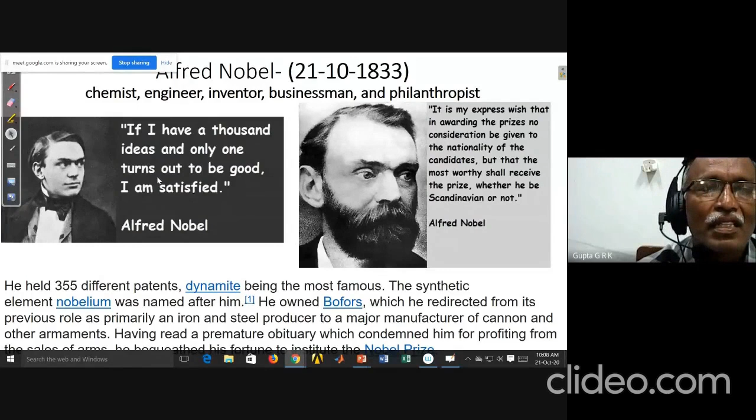And there is another great mathematician, Martin Gardner. I like him very much. He has written so many books on mathematical puzzles, fallacies and paradoxes. He has written so many articles, and he maintained a column in Scientific American for 25 years, these mathematical games.

So whenever I go to the library, the first thing I do is check whether they have Scientific American. I used to go to that rack and find out, and there is an article of Martin Gardner in that. Now he is no more, he is not there. But when I was in IISc, I was a great fan of this particular article.

He was considered the doyen of American puzzles. He was a prolific and versatile author, publishing more than 100 books.

He says, if God creates a world of particles and waves dancing in obedience to mathematical and physical laws, who are we to say that he cannot make use of these laws to cover the surface of a small planet with living creatures? The universe is almost like a huge magic trick, and scientists are trying to figure out how it does what it does.

Okay, that's it. And if you come to the 29th class of today, we'll just browse through or revise whatever all we learned about air standard cycles.

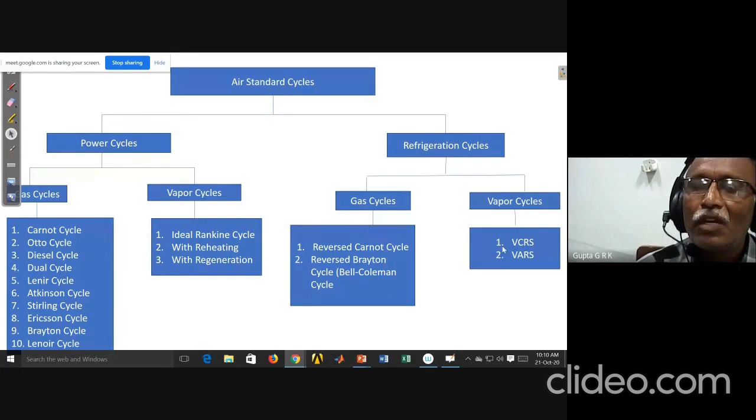In refrigeration cycles, we will have gas cycles. If you reverse Carnot cycle, we get reversed Carnot cycle. If you reverse Brayton cycle, we call it Bell-Coleman cycle. So we know that refrigeration cycle is nothing but reversed power cycle. And in vapor cycles, we have vapor compression refrigeration system and vapor absorption refrigeration system. This is the broad classification.

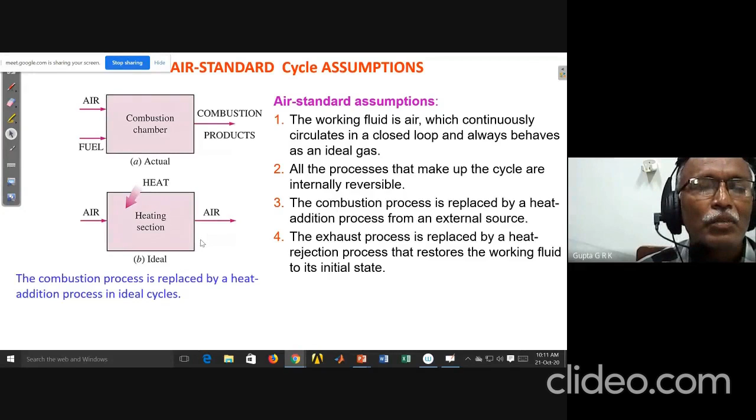So then we have seen what are the air standard cycle assumptions. We assume it is a perfect gas, all processes are internally reversible, and heat exchange processes take place instead of heat addition and rejection. So instead of air burning with fuel, we assume that heat is exchanged to the air without changing its composition. That's why we have a closed cycle, and the combustion process is replaced by a heat exchange process.

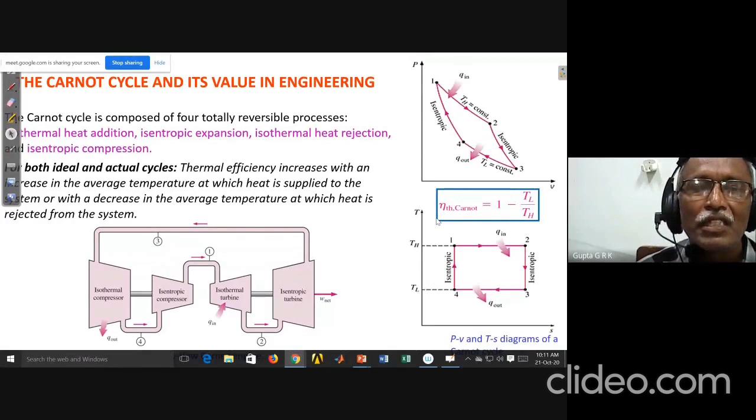And Carnot cycle processes are all ideal processes. This is the general configuration of a Carnot cycle. And efficiency, we know, is 1 minus TL by TH. So the main thing we observe here is that the efficiency of the Carnot cycle increases as we increase the average temperature at which heat is supplied, and decrease the average temperature at which heat is rejected.

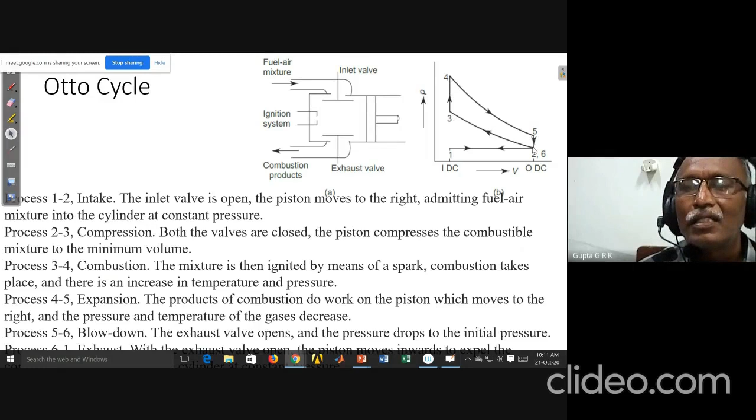And coming to the Otto cycle, we have seen all the processes. I told you there is inlet and exhaust stroke, which normally we don't show in the cycle. We show only these 4 processes: compression, combustion, expansion, and release. So this is that, and we have derived the efficiency.

Efficiency is a function only of the compression ratio, RK, that is V1 by V2. Coming to the mean effective pressure, we didn't derive it, but you should be in a position to derive this. It is a function of not only the compression ratio, but also the pressure ratio, P3 by P2, called RP. And the efficiency increases with compression ratio and also with gamma. This is what we have seen.

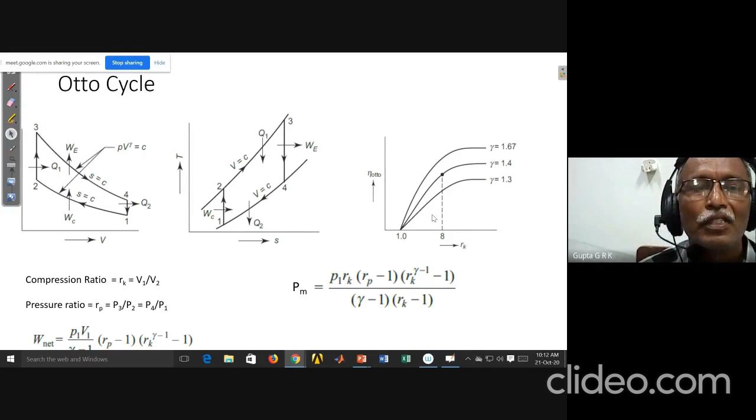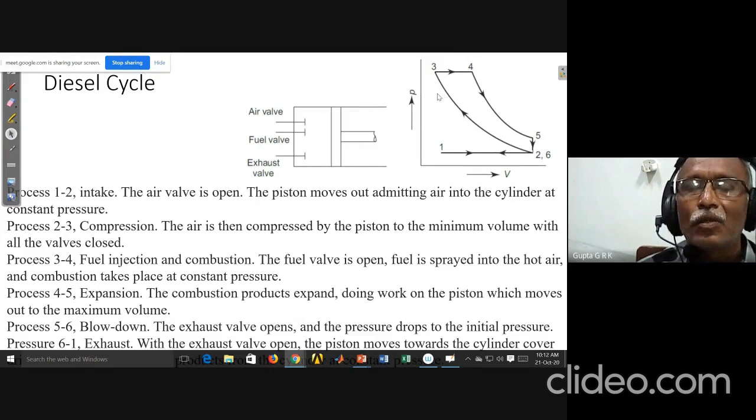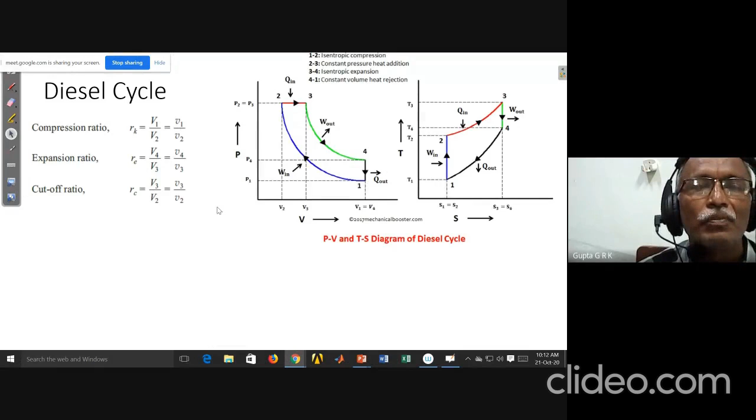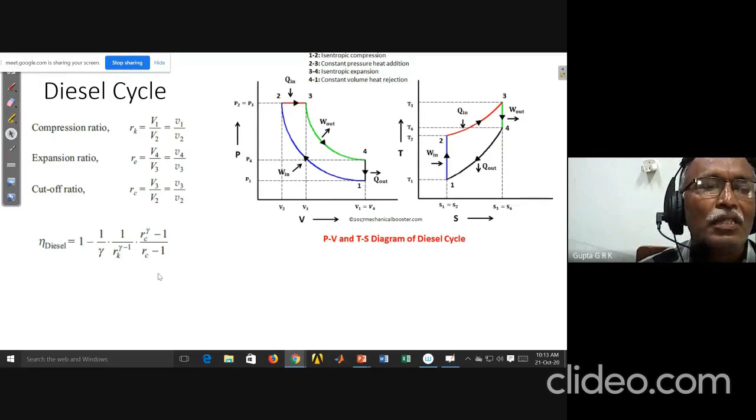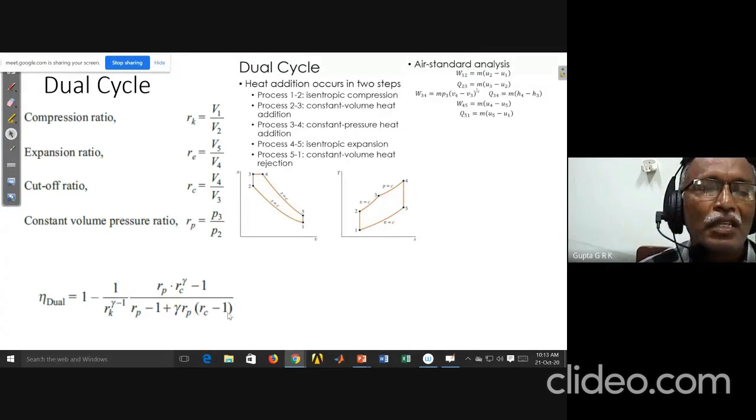Then dual cycle, where we have partial constant volume combustion and partial constant pressure combustion. We have derived the dual cycle efficiency, which is a function of pressure ratio and compression ratio. The mean effective pressure also we can derive. So what we have to do is find W expansion and W compression, and subtract it. You will get the work output by swept volume, you have to find.

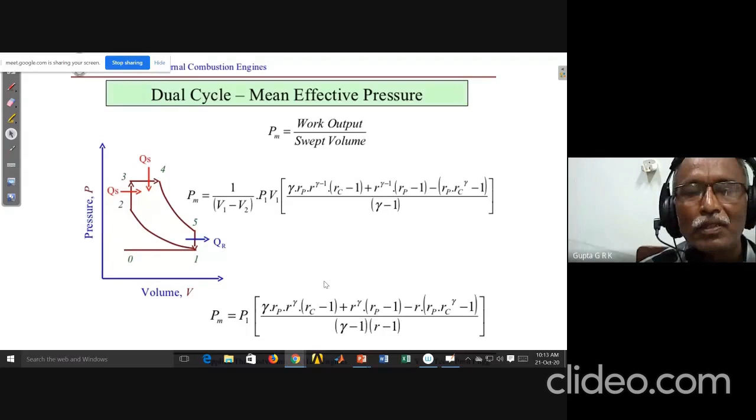And comparison also we have done for different cases. For the same compression ratio, we have seen that Otto cycle is more efficient, and for the same maximum temperature and pressure, diesel cycle is more efficient.

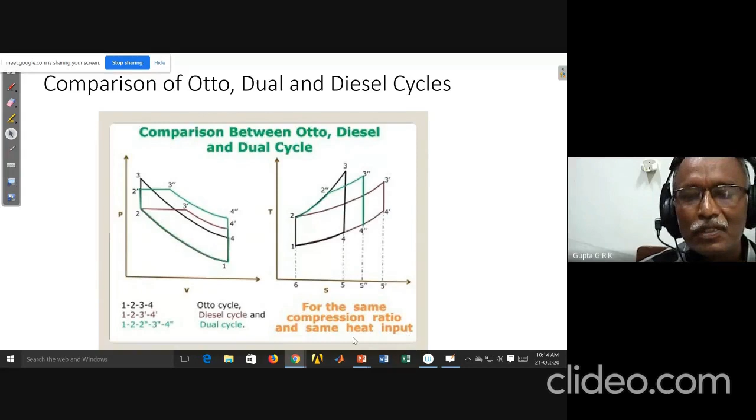And comparison between Otto, diesel, and dual cycle for the same compression ratio and same heat input. Heat input also is same. So here, again, we can see that Otto cycle is more efficient, because whenever compression ratio is same, whatever the difference in other things, Otto cycle becomes more efficient.

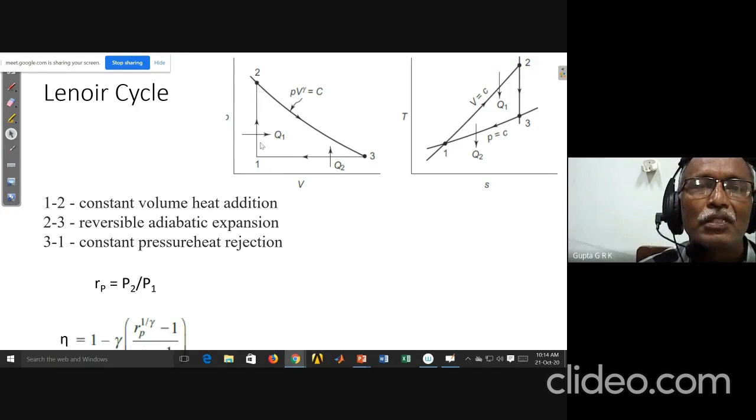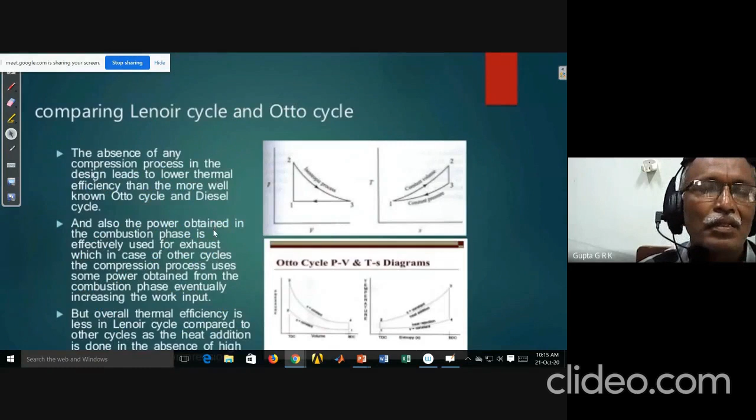Then here also we have derived the expression for efficiency in terms of pressure ratio. Pressure ratio is P2 by P1. And you can compare Lenoir cycle and Otto cycle. So the only thing is Lenoir cycle is not found to be efficient because of lack of compression in it.

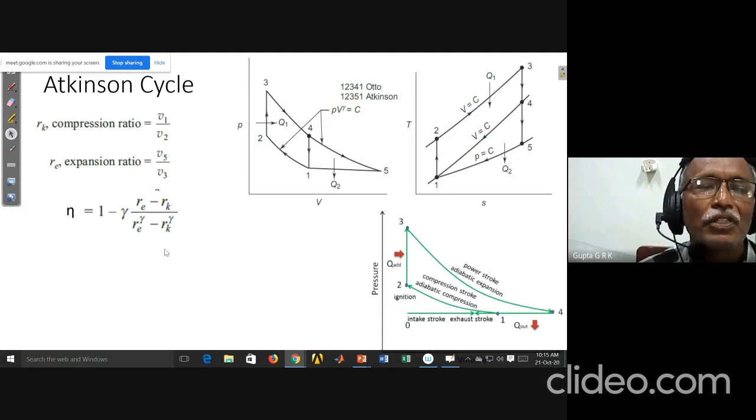Then coming to Atkinson cycle, where I have constant volume heat addition and constant pressure heat rejection. We can see the efficiency is a function of compression ratio and expansion ratio. Expansion ratio is V5 by V3. Here you can see comparison. If you say this is Otto cycle, it is extended Otto cycle, so this piece is extended, and you can compare with efficiencies.

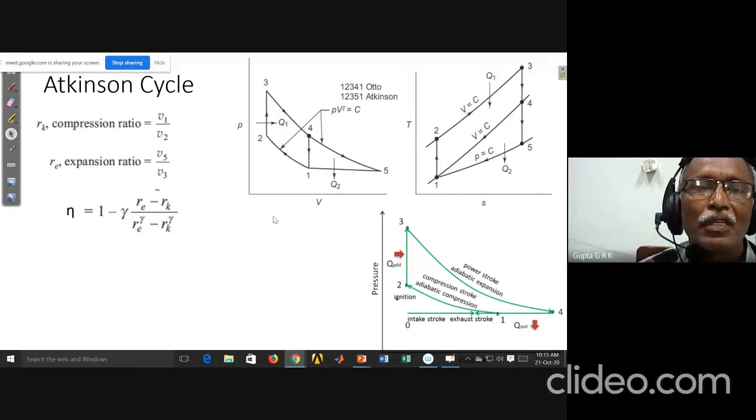So Otto cycle will have this as the heat rejection, and Atkinson cycle has this as heat rejection. So you can see that area is more, and work done is more in Atkinson cycle. Atkinson cycle is more efficient than Otto cycle, but it is not practical because of constant volume combustion, which needs valves to be operated at very high temperature.

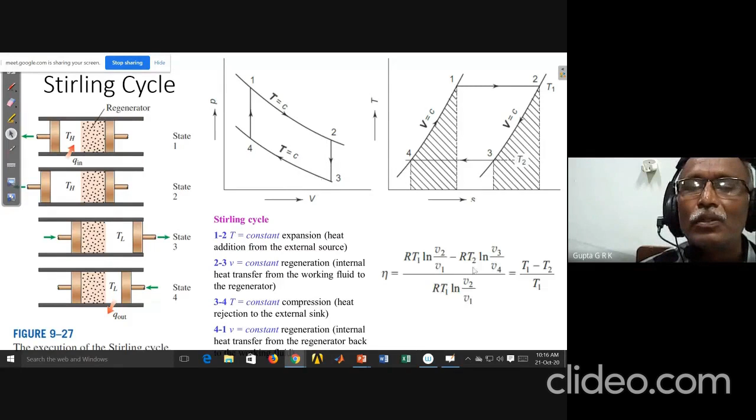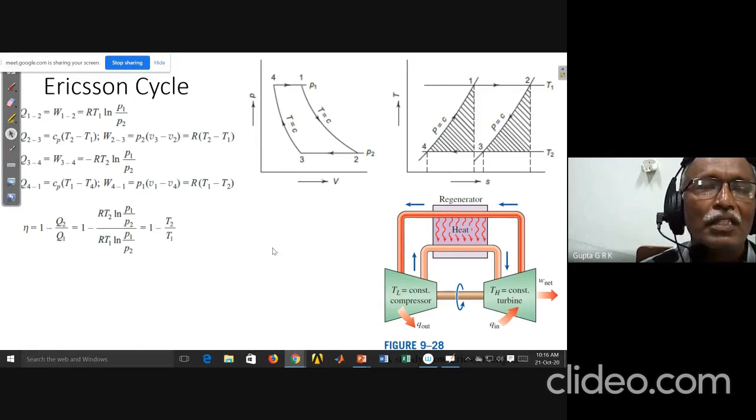And then we have seen the Stirling cycle, which has two isothermals and two isochores, with isothermal heat addition and rejection. That's why, if I have perfect regeneration, then efficiency will be equal to Carnot cycle efficiency. In the same way, Ericsson cycle also we can see, instead of isochores, we will have isobars here. Here also, if regeneration is proper, its efficiency is equal to Carnot cycle efficiency.

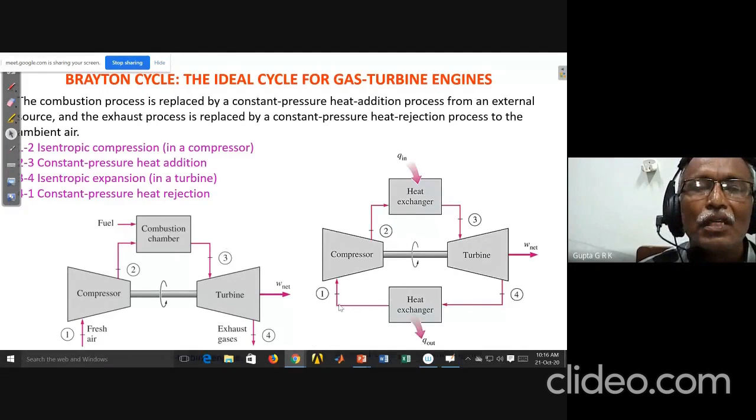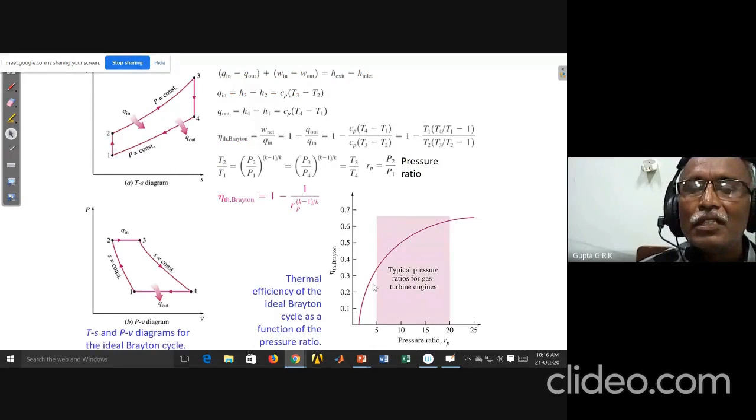And coming to the Brayton cycle, as I told you, already learned in turbo machines, you can see that efficiency is a function of pressure ratio. It is 1 minus 1 by Rp to the power of gamma minus 1 by gamma. Its efficiency increases with pressure ratio. And you can see that there are two extremes of pressure ratio.

If pressure ratio is 1, I will have 0 work done. And even if the pressure ratio is very high, such that it is compressed up to the maximum metallurgical limit, then also there will be 0 work done.

There is a particular pressure ratio which gives maximum work, and that is when T2 becomes equal to T4. That's why I cannot have heat exchange there. I can plan for a heat exchanger because of that.

If my pressure ratio is less, T4 is very high and T2 is very less. So in this case, T4 is so high and T2 is so low, and I can use the heat exchanger to recover that. So heat exchanger can be used only when T4 is greater than T2.

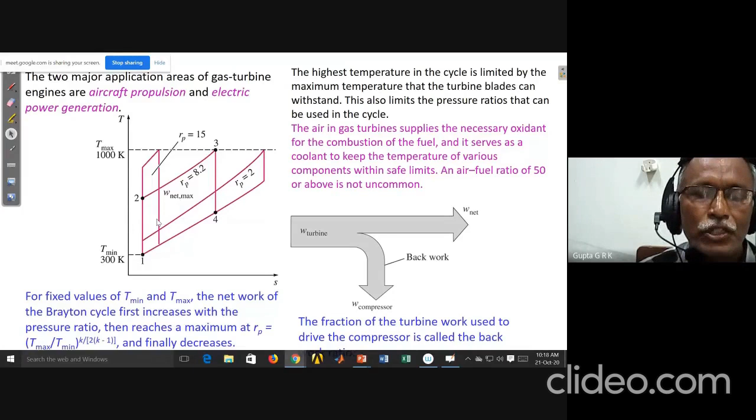If T2 is greater, in this case T2 is very high and T4 is less, I cannot have a heat exchanger because after the compressor the temperature is very high, and after the turbine the temperature is very low. So only if your pressure ratio is less than the optimum pressure ratio, we have to use the heat exchanger.

And so this is the Brayton cycle with regeneration, where T4 should be greater than T2. That's why if you see a perfect heat exchange cycle, when epsilon equals 1, its efficiency will be equal to Carnot efficiency.

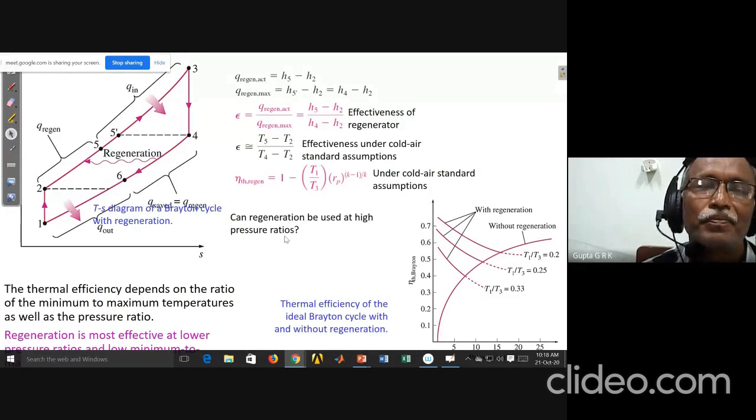As the pressure ratio increases, efficiency actually decreases, and at optimum pressure ratio this will be equal to the simple cycle efficiency. And you can think of intercooling and regeneration.

As I told, intercooling reduces compressor work, and reheating increases the turbine work, by which I can increase the work done. But efficiency gets reduced because I'm adding some low efficiency cycles to the original simple cycle.

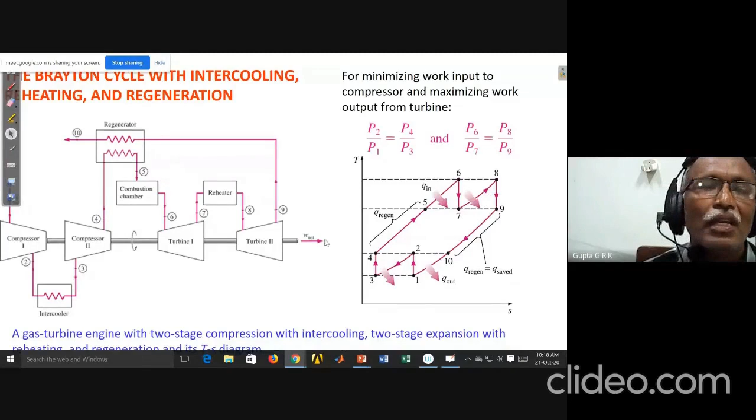And if I have a heat exchanger, I can have a large increase in efficiency. If I can have infinite intercoolers and infinite reheaters, and if I can have perfect regeneration, then this efficiency will become the Ericsson cycle efficiency, which is equal to Carnot efficiency.

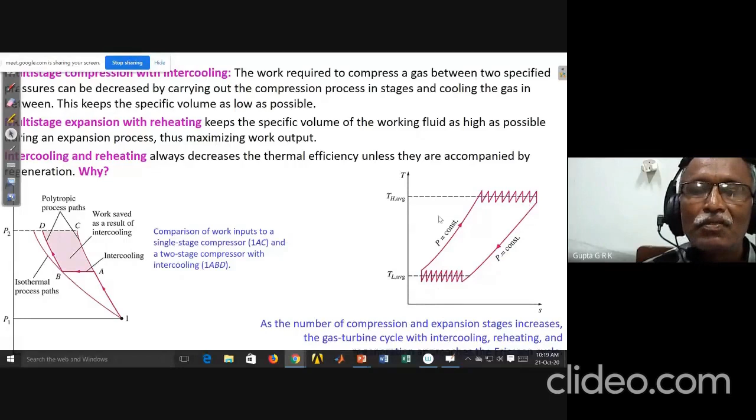Carnot cycle: 2 isentropics, isothermal heat addition and isothermal heat rejection. Stirling cycle: 2 isochores, isothermal heat addition and rejection. Ericsson: 2 isobars, isothermal heat addition and rejection. So these 3 have the same efficiency.

Wherever I have isothermal heat addition and rejection, they are purely reversible, and that's why these 3 have the same efficiency. In the other cycles, 2 isentropics are common, and if there are 2 isochorics for heat addition and rejection, that is the Otto cycle.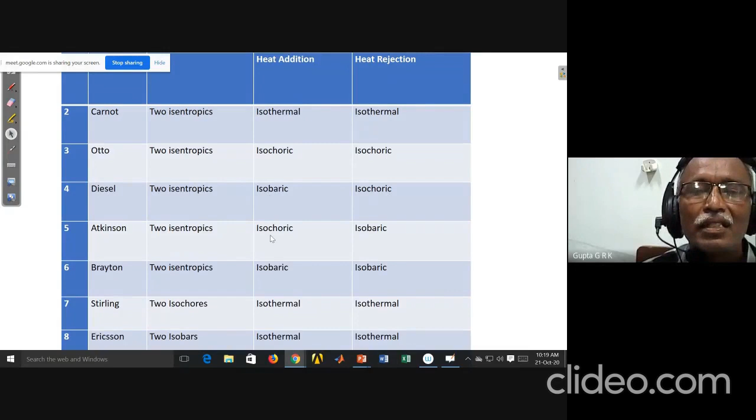Isobaric heat addition with isochoric heat rejection is the Diesel cycle, and Atkinson has isochoric heat addition with isobaric heat rejection, and Brayton cycle has both isobaric heat addition and rejection. These are the various cases we have studied.

And actually there is the Lenoir cycle, with 1 isentropic, isochoric heat addition, and isobaric heat rejection. I have done that, but it didn't come here. This is the revision of 8 standard cycles.

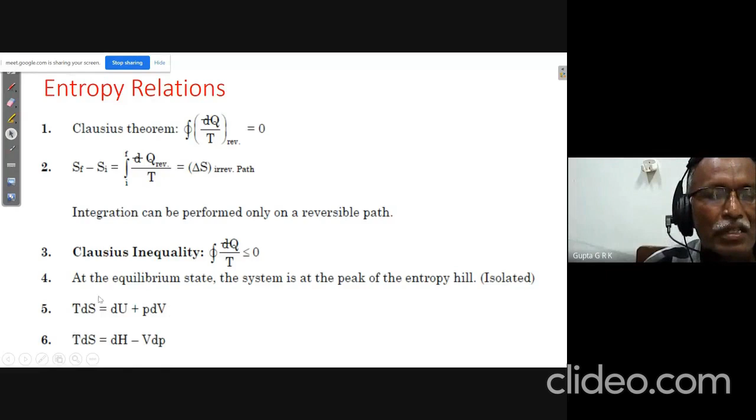But when you combine these two, this is true for any cycle, because there are only properties involved. So these two are called the TdS relations, which are true for all processes.

And so delta S is greater than or equal to 0 for an isolated system. Otherwise it is delta Q by T. For an isolated system, delta Q is 0, that's why we have taken it to be 0 here.

So this delta S total, if I take the isolated system as system plus surroundings, which is the universe, this must be greater than or equal to 0.

Whatever happens, there will be an increase in entropy, and that is called S generation, generation of entropy. So generation of entropy equals 0 for a reversible process, and it increases, so greater than 0 for an irreversible process, and it can never be less than 0. So if it is less than 0, it is impossible. This is what is called the increase of entropy principle.

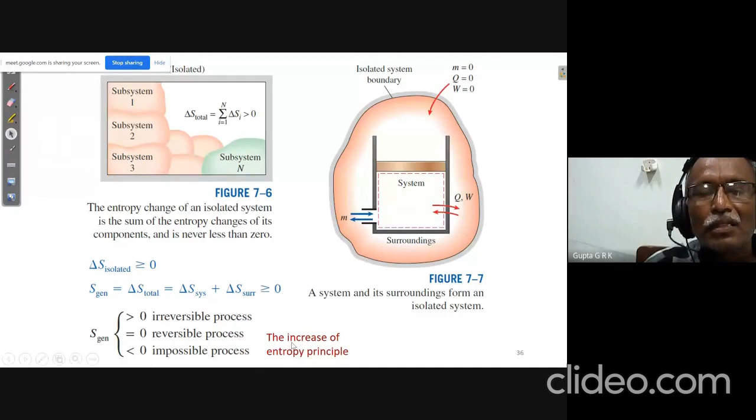We have also seen entropy change for a pure substance, how to find out about it. If I know it is in saturated condition, I can find out for any given pressure and temperature from the tables, SF and SG. If I know the dryness fraction, S2 equals SF2 plus X2 SFG2. In that way you can find out the entropy for a wet mixture.

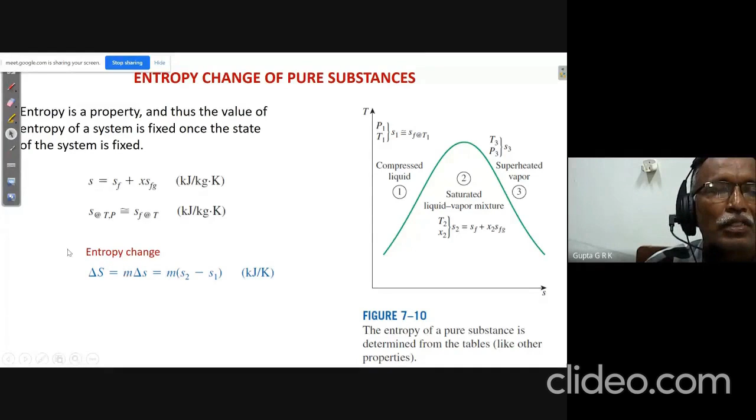If it is superheated, I can find out from the superheated tables, go to the P3 table and the T3 row, and I can get this. If it is compressed liquid, you can take entropy equal to SF at that particular temperature. So at that temperature, find out SF, and that can be taken as SF for the compressed liquid portion. Entropy change M delta S is M into S2 minus S1 for the total change in entropy. This is specific change in entropy.

And TdS relations, it comes from the TdS relations. TdS relation, change in entropy: S2 minus S1 equals Cv log T2 by T1 plus R log V2 by V1. This is one relation. And Cp log T2 by T1 minus R log P2 by P1, this is another relation. As I told, we will get a third relation also.

Cv log P2 by P1 plus Cp log V2 by V1, like that we will get another relation. Based on the process, I can use any relation. If it is isochoric, use this relation, which makes it 0. If it is isobaric, use this, it will become 0. And if it is isothermal, you can use any of them because one of them will become 0.

And this is on mass basis. If it is on a unit mole basis, instead of R here I will have the universal gas constant. Instead of Cp, Cv on mass basis in kilojoule per kg Kelvin, I will have Cv bar and Cp bar, which is kilojoule per kilomole Kelvin. So these also will be available in the database.

Normally we don't get problems of this sort; we use kg basis only. Usually for chemical engineers, they always talk about moles and the universal gas constant and Cv bar. Chemical engineers will use that.

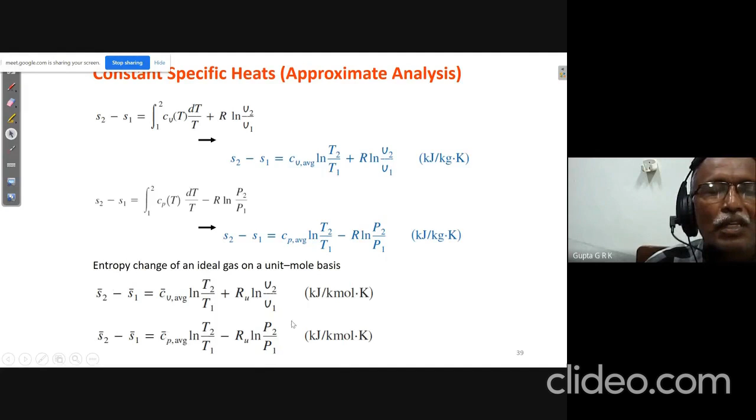When you consider a closed system, for an adiabatic closed system, S generation equals S of the adiabatic system. For system plus surroundings, S gen equals sigma delta S of system plus delta S of surroundings, if there is heat transfer between system and surroundings. System's entropy change: delta S of system equals m into S2 minus S1. But for surroundings, we have to find out the heat transfer from the system to the surroundings, or vice versa, and divide by T of surroundings.

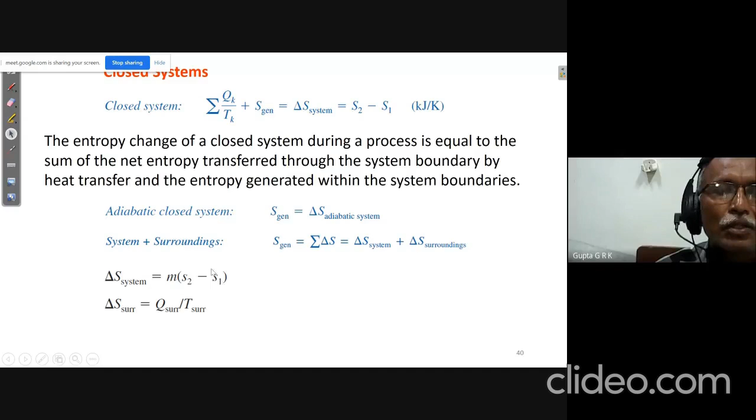Usually this is very important when we do the problems later. We have to see whether the body temperature is the same or varying. If the body temperature is the same, I have to use this particular relation. If the body temperature is changing, then you have to use Cp log T2 by T1 or Cv log T2 by T1.

For a control volume, the rate of change of entropy for the control volume equals the rate of mass entering into its entropy minus the rate of mass leaving, so this is the net rate of entropy entering the system plus generation of entropy. And if there is any heat transfer, sigma q dot k by Tk. So these are the reasons: this is entropy change because of the mass, this is entropy change because of heat transfer, and this is entropy generation because of irreversibility.

This total makes the control volume entropy change. So this is an unsteady flow general equation. If I have steady flow, this dSCV by dt will be 0, and I will have only these terms.

S dot gen can be written in this way. If there is a steady flow single stream, then m dot I equals m dot E equals m dot into SE minus SI minus this. So if it is steady flow single stream and adiabatic, then this will be 0, and generation of entropy equals m dot into SE minus SI.

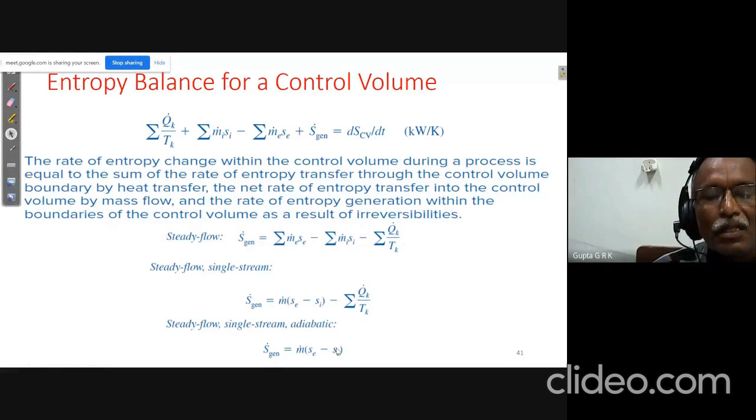It is only because some mass is entering and leaving, its entropy changes. Because it is entering with some entropy and leaving with some entropy, there will be a change in the entropy of the system, and also entropy generation will be there.

Okay, these are the problems we will see. 10 grams—actually we have done some 2 problems when we discussed the entropy chapter.

10 grams of water at 20 degrees centigrade is converted into ice at minus 10 degrees centigrade at constant atmospheric pressure. Assuming the specific heat of liquid water remains constant at 4.2 joule per gram Kelvin, and that of ice to be half of this value, that is 2.1, and taking the latent heat of fusion of ice at 0 degrees centigrade to be 335 joule per gram, calculate the total entropy change of the system.

So how do we tackle it? As we have seen, there are 3 steps. The problem which we discussed already was going from ice to water, and now this particular problem is water to ice. So there are 3 stages: sensible heat removal, latent heat removal, and again sensible heat removal.

It is initially at 20 degrees centigrade. First, it has to become 0 degrees centigrade water. So this is 293 Kelvin, and it is going to 273 Kelvin. So the change in entropy will be Cp log T2 by T1, that is Cp log 273 by 293, which will be the change in entropy for the water going from 20 degrees centigrade to 0 degrees centigrade.

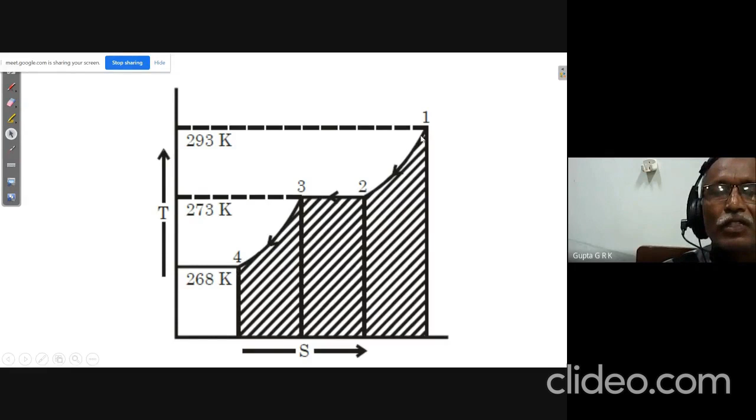So that is the way it is done. It is coming from 293 to 273, then it is changing its phase, and then it is coming to 268. So we have to find out delta S12, delta S23, delta S34.

So this is the way we find S2 minus S1, M Cp dt by T, that is M Cp log 273 by 293. It is going from 293 to 273, so it becomes 273 by 293, and it will become negative since it is going from 293 to 273.

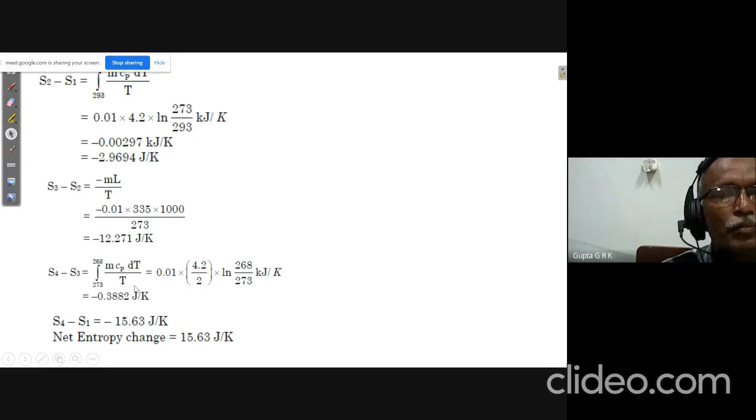S3 minus S2 is m L by T, this is the latent heat at the constant temperature 273. And S4 minus S3 is again M Cp log T2 by T1, where Cp is half of the water Cp, so it is 4.2 by 2. That is the way I can find out the entropy change in all three phases.

We will see another problem. Calculate the entropy change of the universe as a result of the following process: a copper block of 600 grams of mass with Cp of 150 joule per Kelvin at 100 degrees centigrade.

In this particular problem, capital Cp is given, it is not specific heat, it is joule per Kelvin, so it is M into Cp. This is MCp, not joule per kg Kelvin, it is joule per Kelvin. You have to understand that particular thing. The copper block at 100 degrees centigrade is placed in a lake at 8 degrees centigrade.

It is asked to find out the entropy change of the universe, when a copper block is put into a lake. The block is at 100 degrees centigrade, and the lake is at 8 degrees centigrade. So the copper block cools to 8 degrees centigrade, losing heat, which causes a decrease in entropy of the block. At the same time, the lake takes in some heat, but its temperature remains constant.

For the block, I will use Cp log T2 by T1. For the lake, I have to use Q by T. What is Q? I have to find Q as Cp dt, or MCp dt. So Cp of the block is given, and dt is 100 minus 8. That gives Q, so in that way I have to find out both of these things.

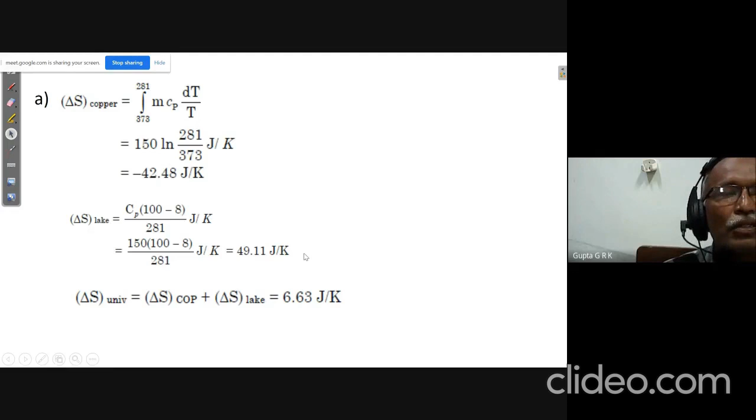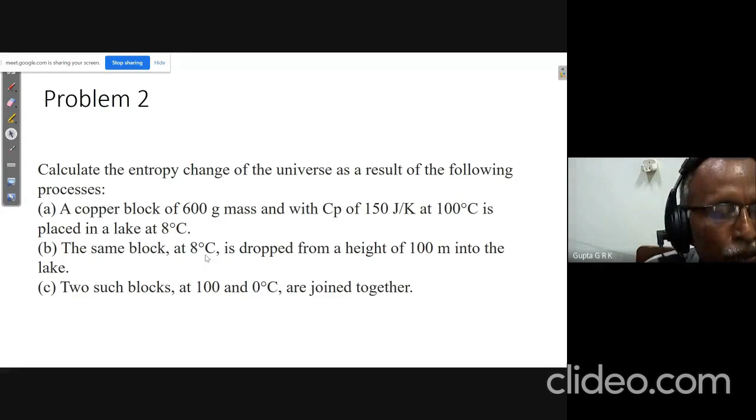Another case is given: the same block at 8 degrees centigrade, with 600 grams of mass, is dropped from a height of 100 meters into the lake. What is going to happen here? Potential energy creates heat, yes, that's right.

And what happens to the change in entropy of this copper block? The block also is... everything okay? Okay.

So in this second case, a block at 8 degrees centigrade is dropped from a height of 100 meters into the lake. If you see the block itself, there is no change in its temperature, so there is no heat transfer from the block. Since its temperature is not changing, its entropy remains constant. The change in entropy for the block is 0, but it is transferring its potential energy to the lake in the form of heat.

We have to find the amount of heat transfer, which is equal to the change in potential energy, that is mgh. m is known, g is 9.81, and h is 100 meters. You can find that work, which is equal to heat, and the temperature is constant for the lake. So that is mgh by 273 plus 8, that is 281.

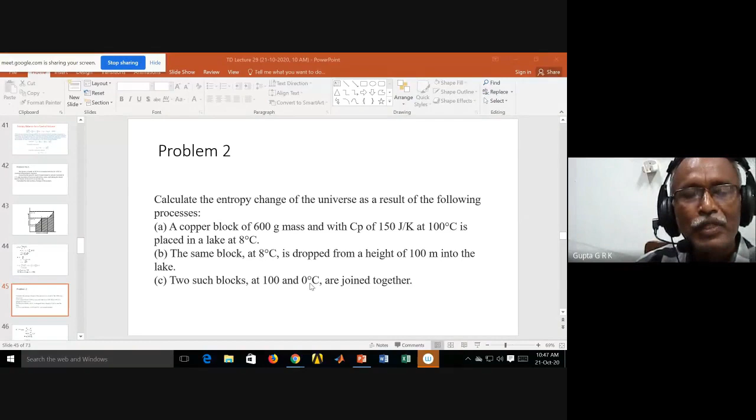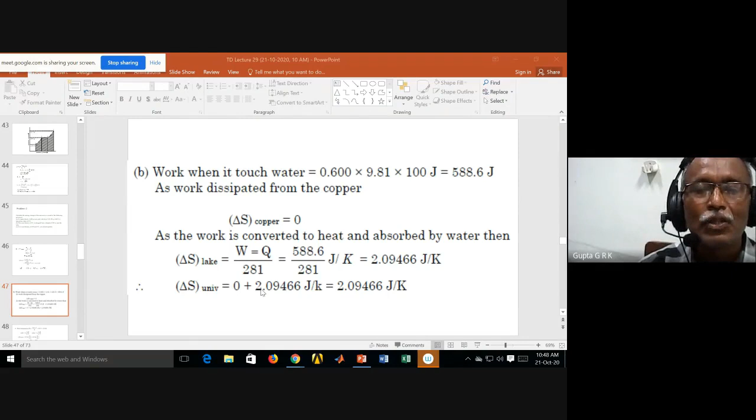In this second case, delta S of the copper block is 0, and delta S of the lake is W equal to Q by 281. This W is mgh, that is 0.6 mass into 9.81 into 100 height, 100 meters. So this is the heat transfer. Divide by 281, we get the change in entropy. Here, the change in entropy of the universe is positive, because for the block it is 0, and for the lake, since heat is given to it through energy, its entropy increases.

Then the third case: when two blocks are joined together, one at 100 and another at 0, you have to find the final temperature. If the masses or materials are different, I have to find MCp of each and determine the final temperature.

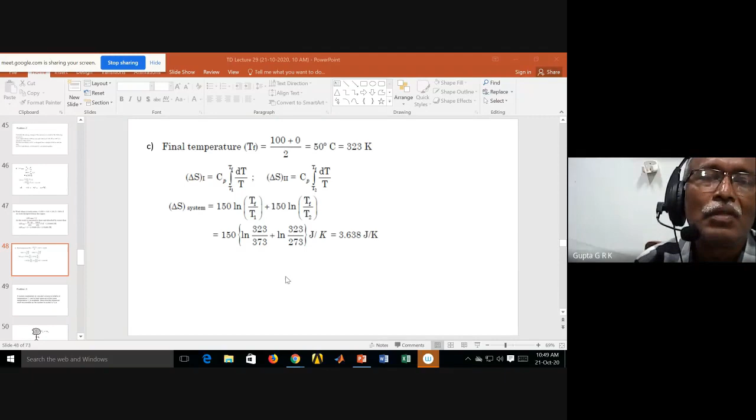In later problems we'll have such cases, but here it's just the average of the two: 50, or 323 K. For the first body, Cp log T final by T1, and for the second also T final by T2, which becomes 323 by 373. So final temperature is 50°C, that is 323 K; initial temperature is 100°C, 373 K. For the second block, final temperature is 50°C, 323 K, initial temperature is 273 K. Finding the total, this becomes 3.638 — this is how we find the total change in entropy.

We will see another problem.

I have a body at high temperature T1, and surroundings at low temperature T0 available. So what is the maximum work I can recover? Whenever a system is at higher temperature than the surroundings, it's possible to recover some heat using a heat engine. So I assume a heat engine working between this body at T1 and the surroundings as a low temperature reservoir at T0. I have to find the change in entropy of the system, the change in entropy of the engine, and the change in entropy of the sink, and this total change in entropy should be greater than or equal to 0 according to the second law. Based on that I find the maximum work.

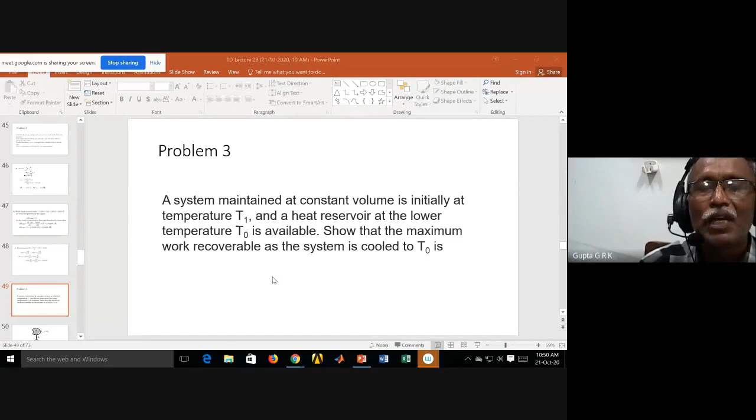So if you think about the system, it is like this: I have T1 here and T0 here, with a heat engine producing W. If the heat taken from here is Q1, the heat given to the sink is Q1 minus W. Here I assume a reversible heat engine, so the change in entropy of this engine is equal to 0.

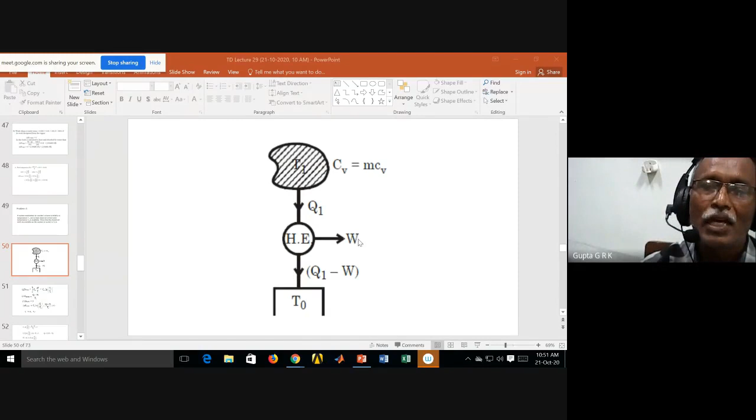For the body, what is the change in entropy? Initial temperature is T1 and final temperature is T0, so Cp log T0 by T1 gives the change in entropy of this system. I have to find the heat given, so first find the heat taken from here: Cp dt, that is specific heat into dt, the change in temperature — T1 minus T0 — and minus W gives the heat to the sink. So W is the unknown there. The change in entropy of the sink is equal to Q1 minus W by T0.

So I add these terms together and set the total greater than or equal to 0, where W is the unknown — I have to get an expression for that. That is the way to do it.

Delta S of body is Cv integral dT by T going from T1 to T0, so Cv log T0 by T1. Delta S of engine for the cycle is 0. Delta S of reservoir is Q minus W by T0. This total should be greater than or equal to 0, where Q is Cv into T1 minus T0 — it can be Cv or Cp, whatever specific heat is given, you just substitute that.

Substitute Q equals Cv into T1 minus T0, and get an expression in terms of W. Put W on the left side, push everything else to the right side, and I get the maximum work that I can extract from the body. Here I'm doing it in symbols.

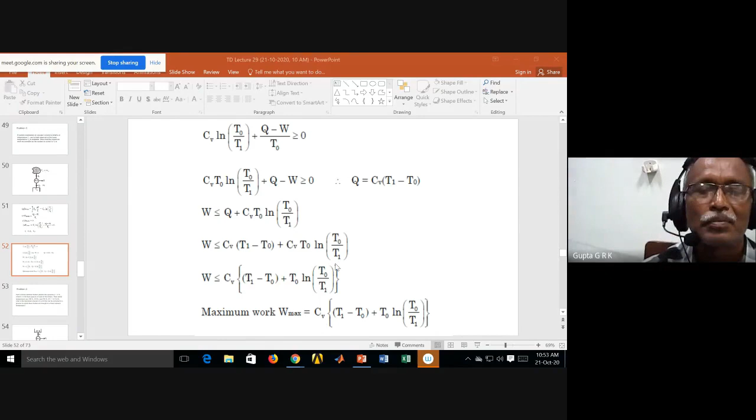In the exam, I may not give T0, T1, W symbolically — I may give a reservoir at a particular temperature and surroundings at another particular temperature, and ask you to find the maximum work that can be extracted. So you need only the specific heat and the two temperatures to find the maximum work that can be extracted from that system. That is the way we have to do it. Any doubts?

Is it clear? Shall I go to the next problem? Okay, we'll go to the next problem.

Each of 3 identical bodies satisfies the equation U equal to Ct. This is not necessary, just given like that, where C is the heat capacity. So heat capacity means MC, so mass need not be given separately. Their initial temperatures are 200, 250, and 540. If C is 8.4 kilojoule per Kelvin, what is the maximum amount of work that can be extracted in a process in which these bodies are brought to a final common temperature?

I have a high temperature reservoir at 540. There are 2 low temperature reservoirs, right? So what is the maximum amount of work that can be extracted? What I have to do is assume 2 engines, one working between 540 and 200, another between 540 and 250. Again, you do the similar analysis whatever we have done previously.

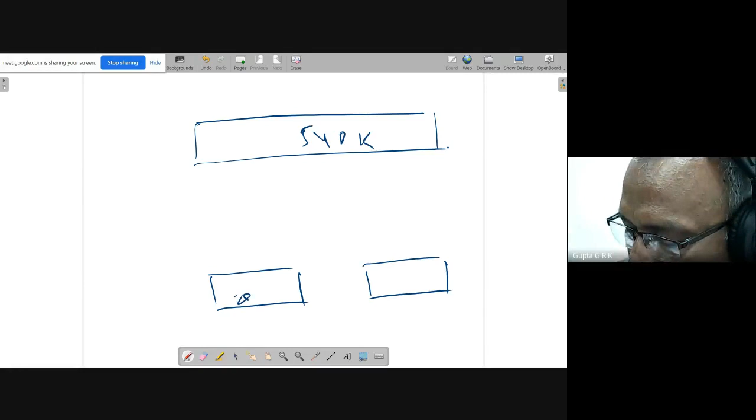So you can assume a high temperature reservoir here, one low temperature reservoir here, another low temperature here. This is 540 Kelvin, this is 200 Kelvin, this is 250 Kelvin. So I can assume this is producing some work, this is producing some work.

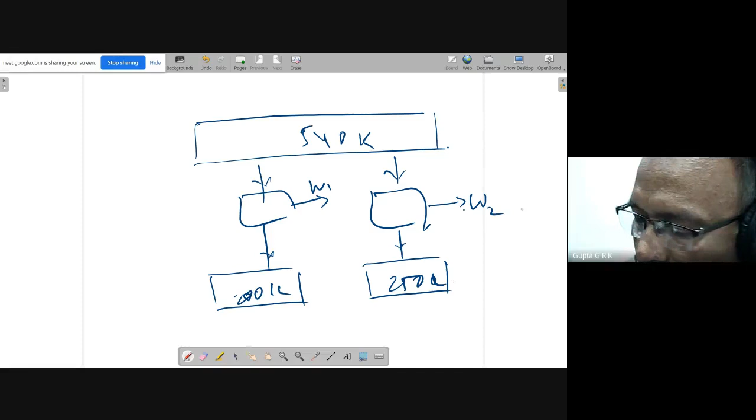Maybe you can take W1, W2. If this is taking Q1 and this is taking Q2, then this may be Q1 minus W1, and this is Q2 minus W2. So this is the way we have to do it. The total heat taken from the reservoir is Q1 plus Q2, and the total work developed is W equal to W1 plus W2.

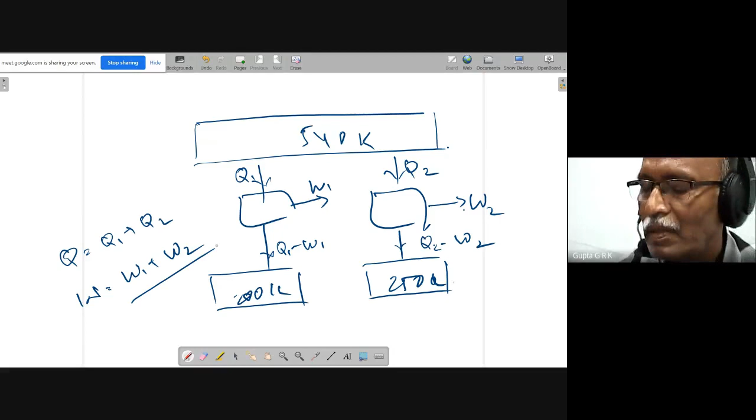So I can find out now the initial temperature, what is that, and final temperature, and what is the heat that is transferred, everything in terms of expressions we have to do.

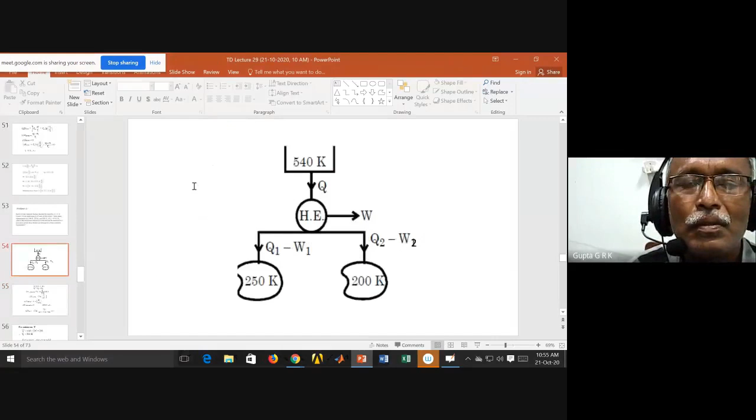Something like this I can assume. So W is equal to W1 plus W2, Q is equal to Q1 plus Q2, and delta S of 540 Kelvin. I don't know what is the final temperature of all the three, so you assume that TF is the final temperature. First I have to solve for TF, then only I can do the other things.

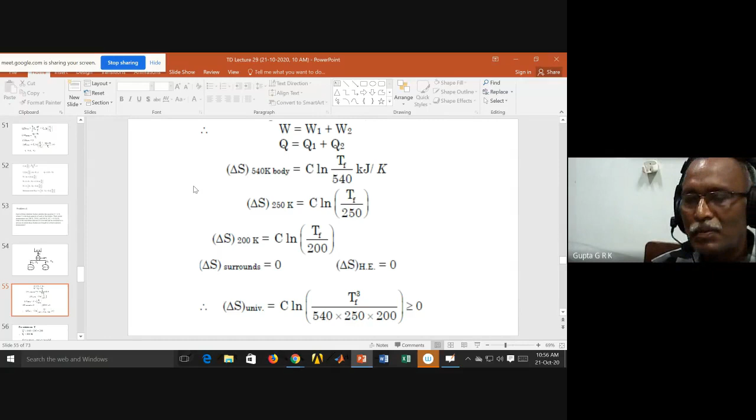So for the 540K body, it is going from 540 to TF. Then for the 250K body, 250 to TF, and 200 to TF. If I add all these things, for heat engines the change in entropy is 0, so the sum of these three should be greater than or equal to 0. If I add all these things, actually, because it is in log, I have to multiply, so TF cube by this you will get.

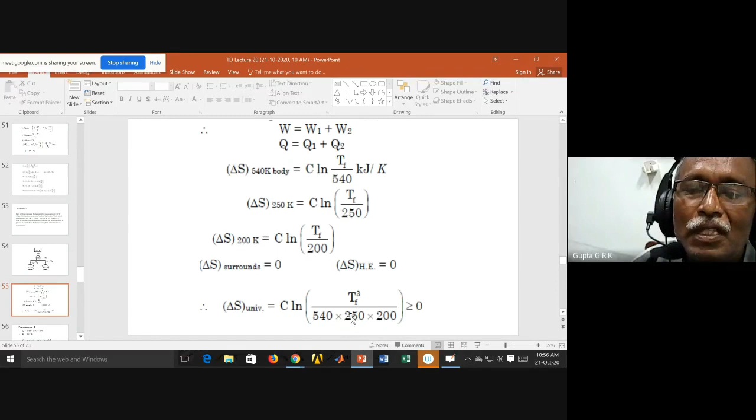And 0 is log 1, so TF cube is greater than or equal to the product of this: 540 into 250 into 200, and the cube root of this becomes 300 Kelvin. That is the way I can find out the final temperature.

Once I know the final temperature, I can find out the change in entropy of all the three bodies, and also the heat transfer. Q is equal to, because 8.4, this high temperature body at 540 is going to 300. The total heat transfer is equal to 8.4 into 540 minus 300. 8.4 is the heat capacity.

Q1 minus W1 is 8.4 into 300 minus 250, and Q2 minus W2 is 8.4 into 300 minus 200. So from this I will get Q1, Q2, and Q1 plus Q2 minus of W1 plus W2 is equal to 1260. Q1 plus Q2 is already found out to be 2016. So 2016 minus 1260, that is 756 kilojoules. This is the maximum work that can be extracted.

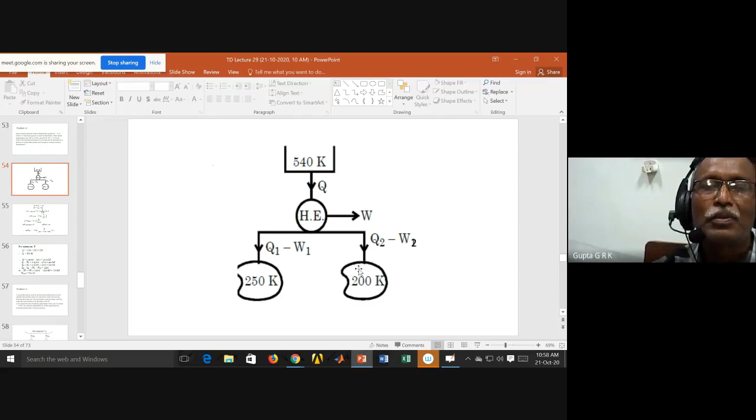Only thing is what I am doing is assuming some final temperature for all the three, finding out what is the change in entropy for this, and what is the heat transfer from each. Q1, Q2, everything I can find. That is the way I have to go about it.

Now coming to another problem: a reversible power cycle R and an irreversible power cycle I operate between the same two reservoirs. Each receives QH from a hot reservoir. The reversible cycle develops work WR, while the irreversible cycle develops work WI. Evaluate the rate of entropy generation for cycle I. For the irreversible cycle, I have to find out what is the rate of entropy generation in terms of WI, WR, and TC.

Where is that board?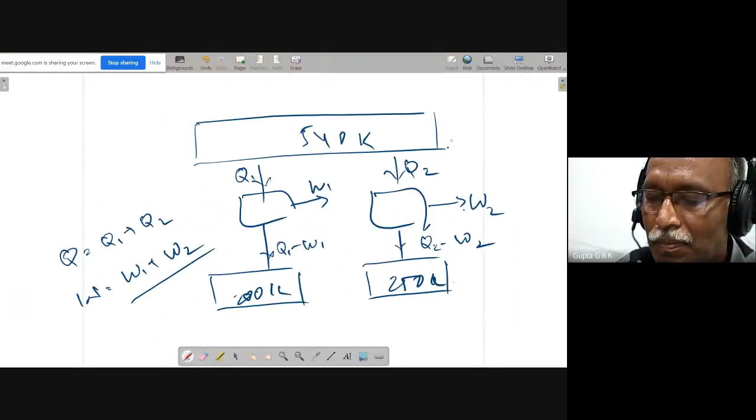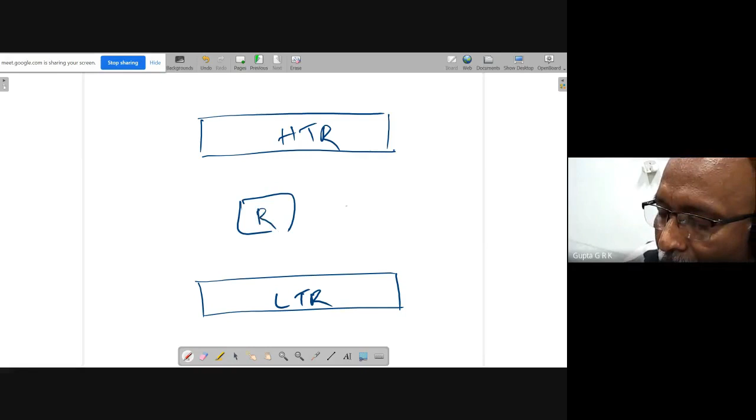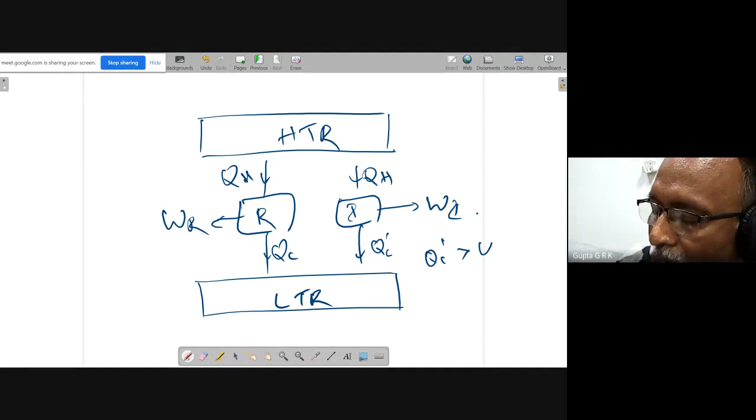So if you see now, we can draw the figure like this, and we have two reservoirs, high temperature reservoir and low temperature reservoir, and I have a heat engine, a reversible engine, and an irreversible engine, both taking QH. This one produces WR and this one produces WI, and if you take QC, this will be different because the irreversible cycle will have less efficiency. It rejects more heat, so QC dash is greater than QC. So this is the way first we have to draw.

Something like this. And then, because for an irreversible cycle, if I take only the irreversible cycle, here QH is there and QC dash is there. So here the entropy change is QH by TH, here QC dash by TC, and this total should be equal to the irreversibility, the change in entropy for the irreversible engine.

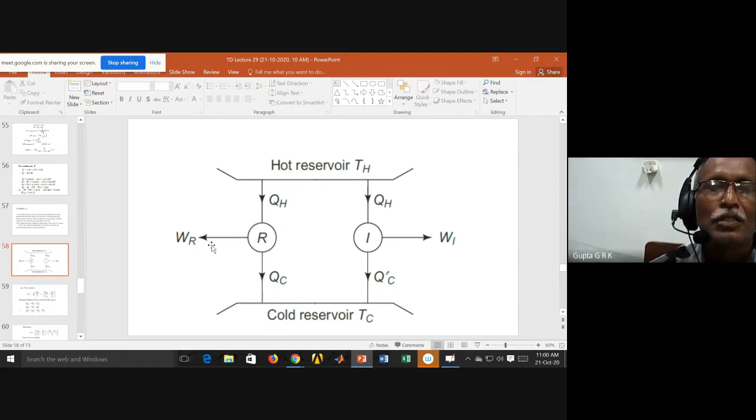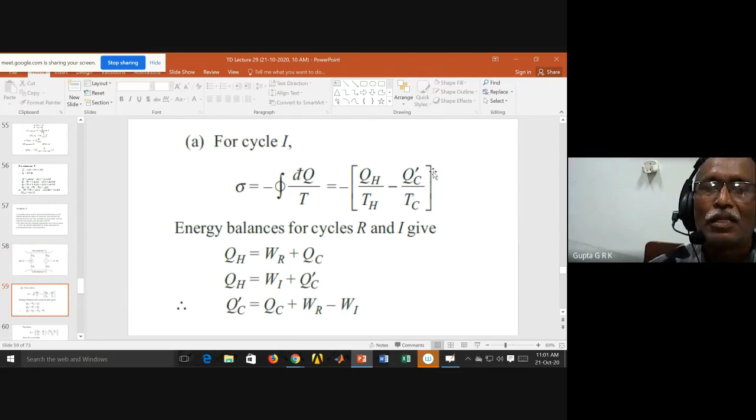So QH is equal to WR plus QC. So here QH is equal to WR plus QC, and here QH also equal to WI plus QC dash. So WR plus QC is equal to WI plus QC dash. Based on that, I can find out what is QC dash, and this QC dash can be substituted with this expression, and then we will get a single expression like this.

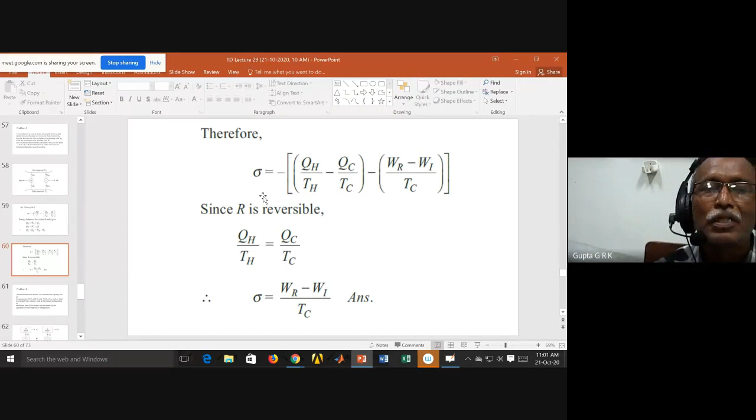And since R is reversible, QH by TH is equal to QC by TC for the reversible engine. So from that, I can see that this particular term will become 0, and I am going to get WR minus WI by TC. This is the way I can find out the change in entropy for the irreversible engine.

So quickly we will see another problem. Three identical finite bodies of constant heat capacity are at temperatures 300, 300, and 100. If no work or heat is supplied from outside, what is the highest temperature to which any of the bodies can be raised by the operation of heat engines or refrigerators?

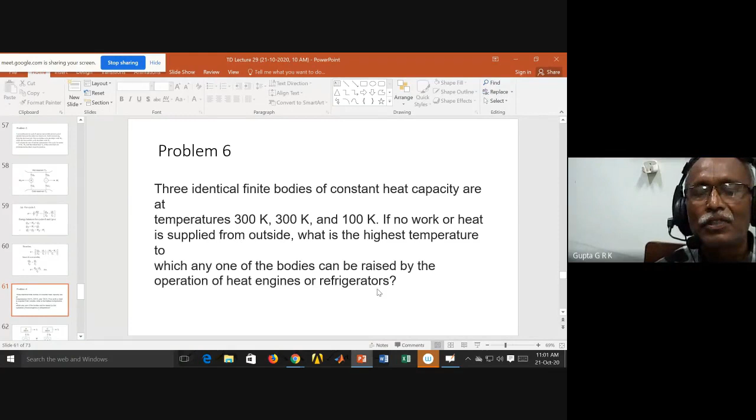So I have to find out what is the final temperature. So here I have 300 Kelvin, 300 Kelvin, and 100 Kelvin. I assume there is a heat engine working between these two and a refrigerator to supply heat to this. So here there will be a decrease in entropy, and here there will be an increase in entropy for this.

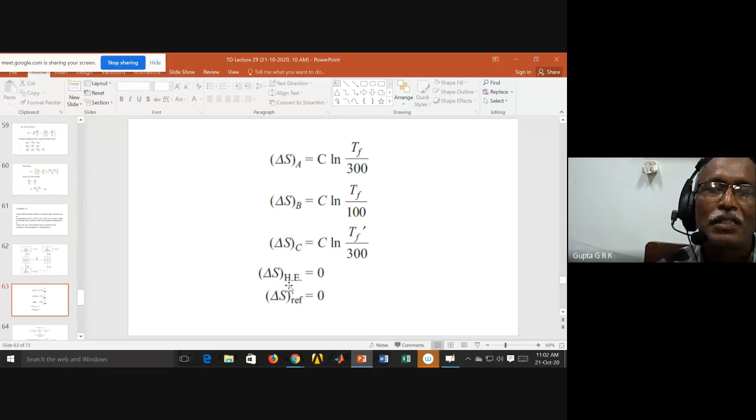Assume all of them come to some TF, and this TF I have to solve for. Delta S of A, B, C, all three reservoirs, because I'm assuming TF is the final temperature. This is getting reduced and this is getting increased, so that's why I will take this as TF and this as TF dash. So this is C TF by 300 for A, TF by 100 for B, and TF dash by 300. For the heat engine and refrigerator, the change in entropy is 0.

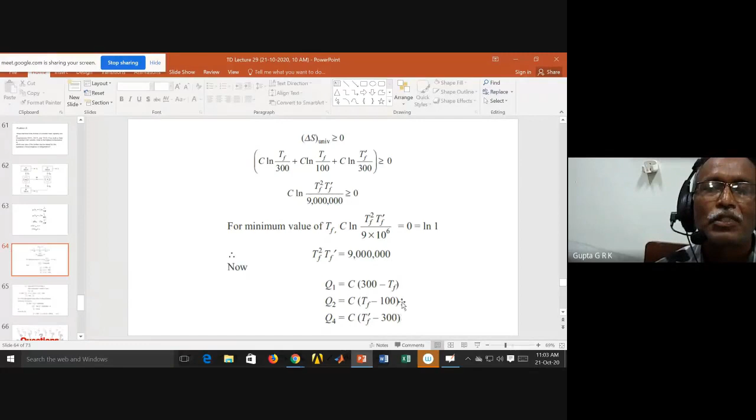And the sum of all of them, if you take, this should be greater than or equal to 0. So I will get TF square TF dash by 9 into 10 power 6 equal to 0, which is equal to log 1. So TF square TF dash is equal to 9 into 10 power 6. And we can find Q1 is equal to Qt is equal to, because C dt, I can find out these expressions.

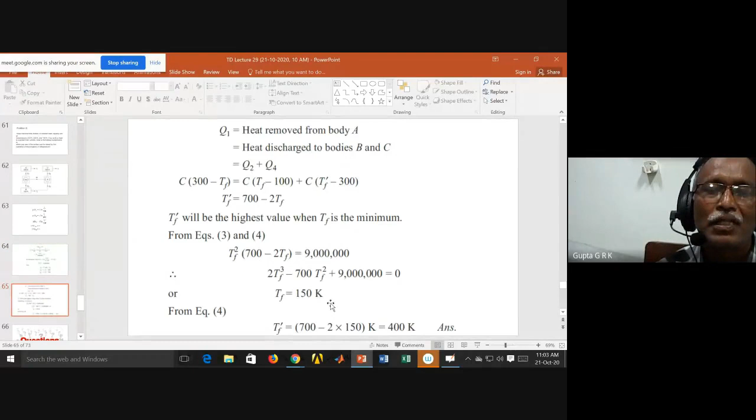So heat removed from body is equal to heat discharged to bodies B and C, so that is Q2 plus Q4. Solving this, I will get TF dash in terms of TF, so I'm getting two expressions. One is this equation and another is this equation. I have to solve them to get TF and TF dash. And TF is 150, TF dash is 400. So like this, we can solve the problem.

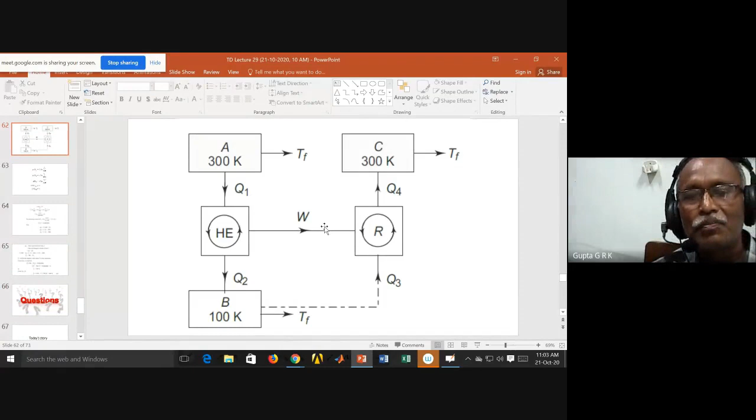Okay, you go through these problems. Actually, these problems are taken from the entropy exercise of P.K. Nag. Because those book problems are good, we have solved those problems. You can go to the worked examples. You have to go through the worksheets I have given, right?

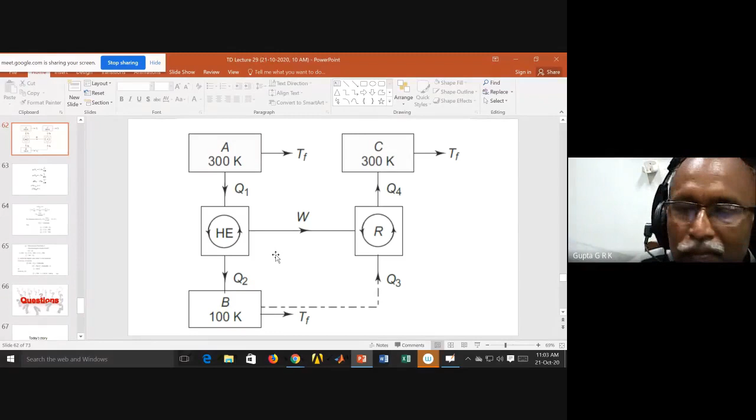Okay, slip in centrifugal compressor. We'll see if there is any other doubt from thermodynamics, otherwise we will talk about it.